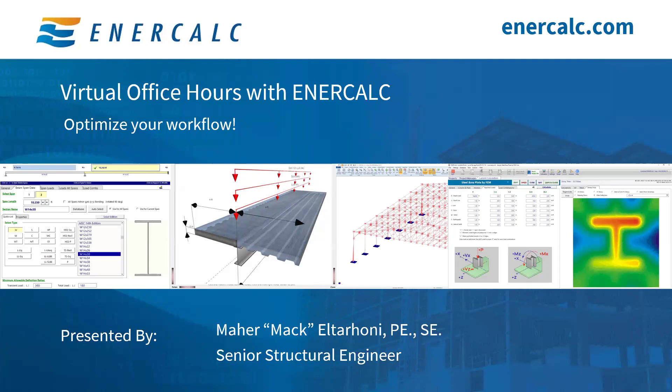As Seth said, I am Mack Eltarhoni, and I'm excited to be presenting to you today the wood beam module from ENERCALC's library of diverse and extensive modules. So I'd like to start our session with a brief overview of the overall agenda. Today we will be covering a PDH announcement, and then we'll go over ENERCALC's latest build, what's new in ENERCALC, and then we'll really dive into the wood beam module, and then we'll talk a little bit about how to register for office hours so you're notified in the future directly in your email. And finally, we will wrap up with live Q&A.

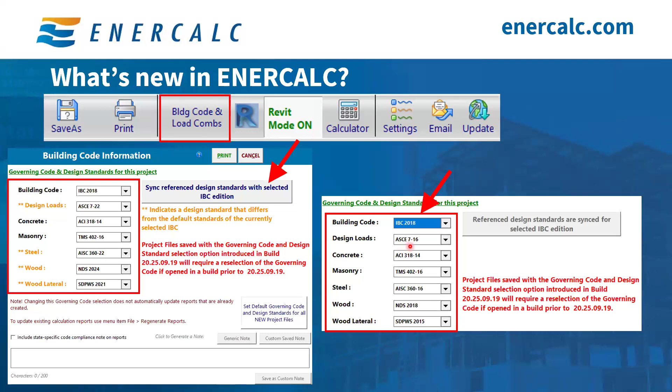So once you have this all done, then you're good to go. Everything is compliant with the IBC version that you selected, as you can see here, ASCE 7-16 instead of 7-22. So keep in mind, all of the code changes that we just did will only apply to the calculations within this ENERCALC file. If you want to apply the code selection as a default for all future projects, so every time you open a new project it will show your selection as the default, then you will need to take it a step further by clicking on this button.

If you click on this button that says set default governing code and design standards for all new project files, you will get this window, and it will show you the old defaults and the new defaults that you want to change to. For example, the old default was IBC 2018 and ASCE 7-22. But if you remember, when we synced everything, this became ASCE 7-16, and that's exactly what happened here. So I'm trying to just set these as the new defaults.

If everything looks fine, then I click save and close. If they don't look right, then I cancel and make the adjustments that I need to make. So once the new defaults have been selected, every time you open a brand new ENERCALC file, those will be the default values for the code and the design reference standards.

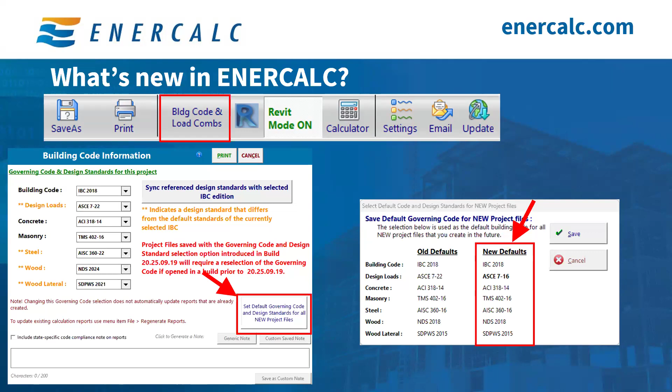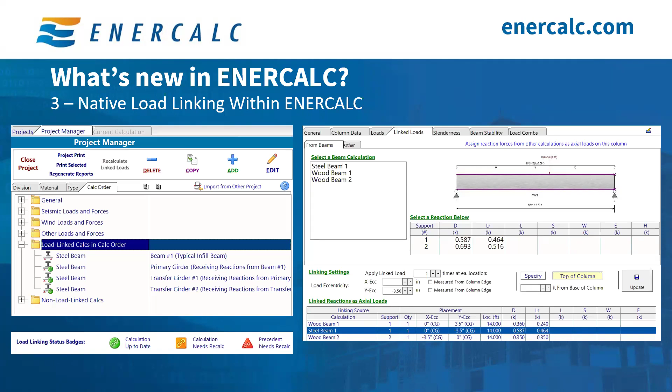Load linking is currently available for steel beams, wood beams, steel columns, and wood columns, and we are actively working on integrating more modules as we go. So if you'd like to learn more about load linking, I created a playlist of short videos on YouTube to walk you through how to use load linking step by step, so you can start leveraging this tool in your projects. I also added a new video recently, about 3 months ago, I believe.

I added a new video to the YouTube load linking playlist for a full practical example of how to use load linking in a real-life design application to transfer reactions from a wood beam to a steel column or from a wood beam to another wood beam and so forth. So we've got a pretty decent variety right here to show you how the load linking for steel and wood is interchangeable and they all play together nicely.

This definitely is a huge help to minimize the risk of transcription errors. But in reality, the most help I get out of this is whenever you have rafters sitting on a beam, sitting on a column, or maybe a beam, then a transfer girder of sorts. If you have just this spider web of members sitting on top of each other, it's definitely nice to have this automatic method of tracking the loads and bringing them all the way down without you having to do this manually and transcribe them from one calculation to another and track all those changes.

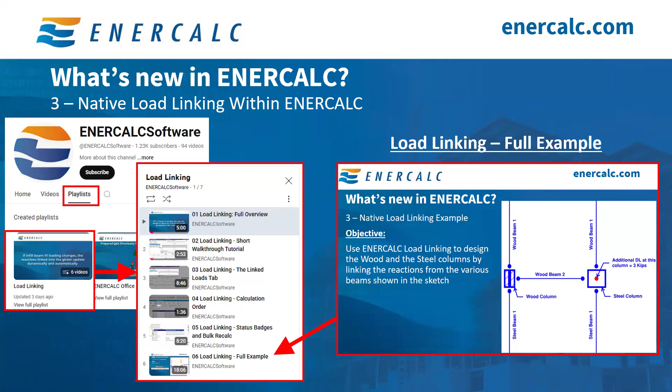Another update is the ability to export tabular detailed results from ENERCALC to a CSV file. This is, of course, useful to many engineers who like to post-process the results outside of ENERCALC. Maybe they have their own calculators or spreadsheets that they want to take some of these values that we provide and post-process them. So this makes it a little bit easier to interface with other tools that your team might have at their disposal.

For example, you can click on whatever detailed results you want, for example, the ASD shear and moment, and I can just right click, save to a CSV file, and it'll be downloaded and we'll be good to go. And you can export results to CSV for pretty much all of our modules now: columns, beams, slender walls, shear walls, foundations, and all of our analysis modules.

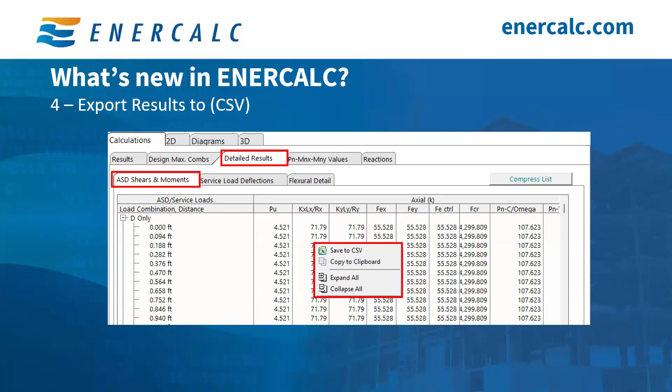This is also something that we added in recent months by popular demand. But we made an important update to the general footing module. Our users now have the option to specify top reinforcement in the footing for those cases where you have tension at the top of the footing rather than your typical case of tension at the bottom. You can specify rebar size and quantity separately for each direction. You can see it right here.

So the standard module that we've had for the longest time used to have just bottom reinforcement, parallel to X and parallel to Z. So those are the two directions, and you can have the bar size and the quantity of rebar controlled differently for each section.

Now you can check this option to say specify top reinforcement, and you can do the exact same thing. So this allows you to specify the four reinforcement that you need to have, the four layers.

And we expanded here our results to try to be a little bit more descriptive. So it says bottom tension, bottom, top tension, top tension. So it just kind of helps you a little bit in each direction and what controls in that direction, to give you a little bit more ease of navigation.

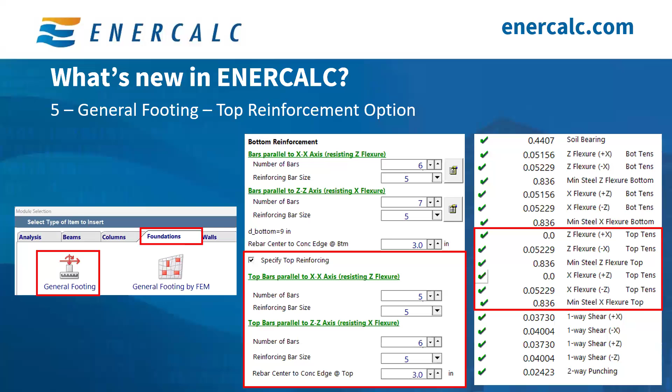And another item that's been really a huge help to many people is ENERCALC for Revit, especially for firms that already have the engineers do their own modeling. They do a lot of the work in Revit, and they use ENERCALC to perform a lot of their designs, beams, columns, and all of that.

ENERCALC for Revit is pretty much a Revit plugin that allows you to design structural members fully within Revit without having to export information or analytical models or analytical sticks or anything to another outside calculation software. You can do everything directly from your familiar Revit environment.

So if you designed a beam, it knows that, okay, this is the beam you have, these are the reactions you have. And next time when you go and design the column adjacent to the beam, it will say, okay, you have this beam framing into that column. This is the reaction that's coming from there, and it'll grab it for you, envelope it, and take care of it, and it tracks this load path very intuitively and very easily.

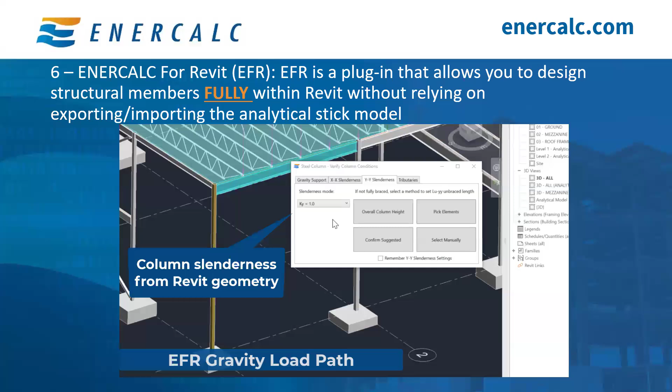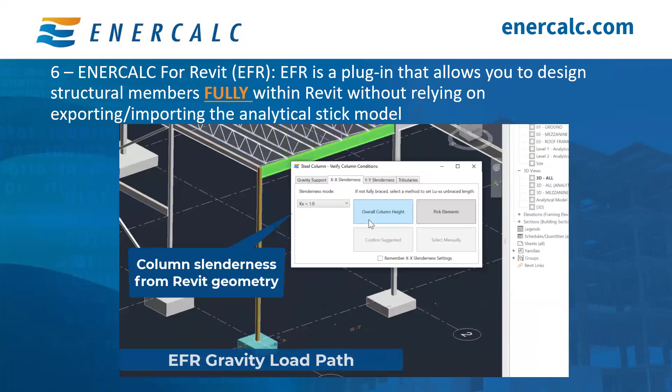And currently, ENERCALC for Revit supports steel beams, steel composite beams, wood beams, steel columns, foundations. And this is biaxial loading. As far as foundations go, they take loads in all directions. Steel columns take biaxial loading. So you get the full capabilities of ENERCALC modules baked into this. So you'll have a full gravity load path.

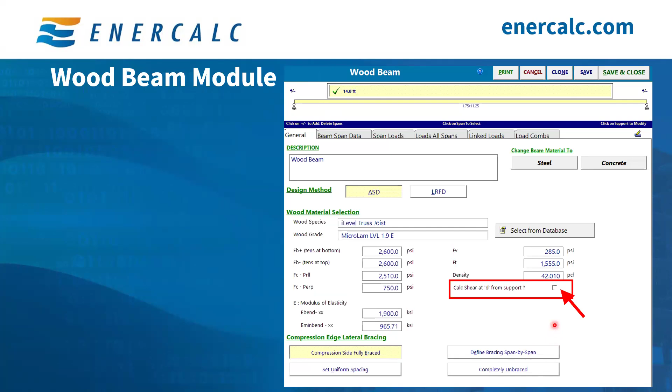So just be careful how to implement this option. For me, I'm just not going to implement it, so I'm not going to be worried about it. But if you do use it, just be aware of how it's used. Also, if you do have point loads within that D distance, the code does not allow you to ignore them. You're allowed only to ignore the uniform distributed load portion, but if it's a point load within that D distance, you can't ignore it from a shear perspective. So if you use this option, just be aware of the various nuances in there. If you skip it, then it'll just use the full shear and everyone's happy.

So moving on here, the last item that we have under this tab is the bracing for the compression side of that member. This is lateral bracing for lateral torsional buckling, or really the beam stability factor calculation. So this is a roof beam with wood sheathing on top of it, so I am comfortable assuming that the compression side of the beam is fully braced. However, you can pick other bracing conditions. What matters is that you do have the options to do whatever you want to do.

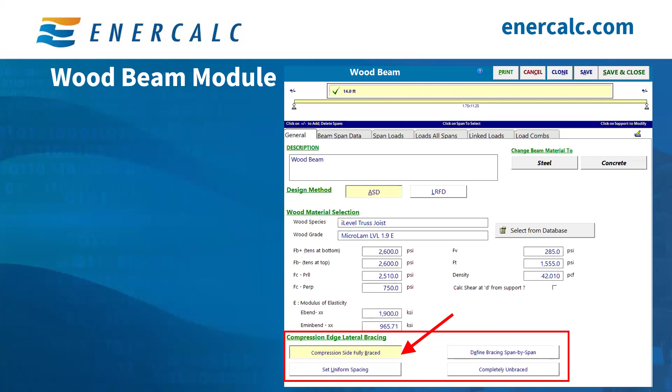So you can pick other bracing conditions, such as bracing at certain spacing intervals, maybe every 2 feet, every 8 feet, every 5 feet, whatever you want to do. You can say it's completely unbraced. Also, this is a single span, just the 14 feet, but if you have a multi-span beam, you can define the bracing condition for all of the spans of the beam, or you can pick one span at a time and say, for span number one, we're fully braced. For span number two, I'm not braced at all, or maybe I'm braced only at 2 points. So you have a great level of flexibility in determining what that bracing looks like. So again, for us, we're just going to assume the compression side is fully braced.

Moving on to the next tab, which is the beam span data. So we have, again, one span. It's right here, and it's 14 feet based on our example. And now we're ready to determine a size or use a size. So we have one of two approaches here. The first approach is to just pick a size, like, okay, I think this is the size that I want to use. I think this would work, or maybe you have an idea that you want to test.

So you know a particular size, 1.75 by 11.87. That's what I want to use. So I'll just click on the Microlam. So this is right here, and then I'll get the various sizes that are recorded under the TJ Microlam, the LVLs.

So then I'm just using this size. I can go there, click on that, and see if this one works, or if it doesn't work, then I'll change it, I'll play with it. And this is the manual method. So that's the first approach.

Another way of approaching this is using the auto select button right here, this button right here. So the auto select button, this second option right here, allows ENERCALC to auto select sizes for you by clicking on this button and then getting this window and choosing certain parameters. So if you click on the button right here and you get this window, you will be able to almost kind of choose. First of all, you can choose your wood type, what do you want to use. So it's a micro lam, so it looks into that family of members.

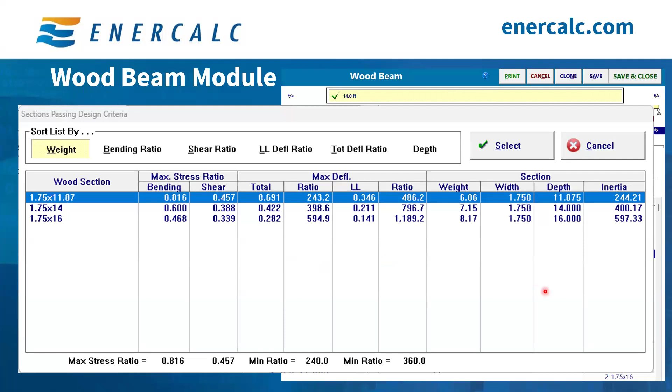So this kind of gives you a good idea about the various sizes. And then you kind of have to select which one you want to use. But at least this narrows it down based on your criteria. And it runs this little bit of grunt work for you. So for us, we're just going to go ahead and use this 1.75 by 11.87.

So there's something here that's worth noting: member width and depth are auto-populated based on the member size that's selected. So you selected 1.75 by 11.87. Those are the right sizes right here, width and depth. They're auto-populated. However, if you do have some sort of a custom size member, maybe you have something that's 2.25 by 14 and 3/8.

If this is what you got, if you got the manufacturer to make something like this for you due to maybe special conditions or whatever, you can always put that information here and it will run the numbers based on that, because it uses these sizes, the width and depth, to come up with your IX and IY, and of course your area and all of the other information that you might need to move forward. So if you have something different, you can always use that right here.

Now, this option, we're not going to get into it that much because it's not part of our example, but this option that says all spans minor axis, YY bending, means that this member that you're using, the 1.75 by 11.87, if we want to load it in the minor axis, on the weak axis, aka flat wise, if that's what we want to do, then you click on this option right here, and it will run the numbers based on this member being flipped on sideways and run in the weak axis.

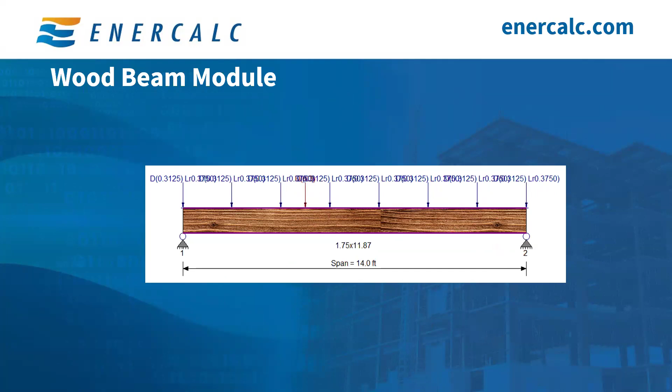And of course, lastly, here is your load combinations. You have combinations for strength combinations, you have combinations for deflection and reaction combinations, and you can do whatever you want to do there, turn them off, turn them on, add new ones, and so forth.

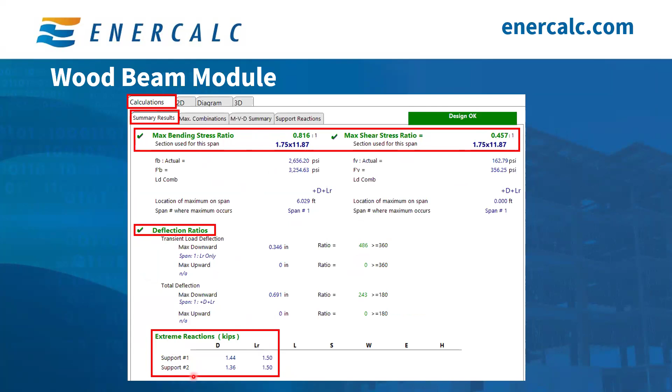Now that you're really finished with all this, now you can finally evaluate the results. So if you click on calculations and summary results, you can see your maximum bending stress ratio right here, your maximum shear, your deflection ratios, and your extreme reactions per support. You get, of course, all of your shear and moment diagrams right here.

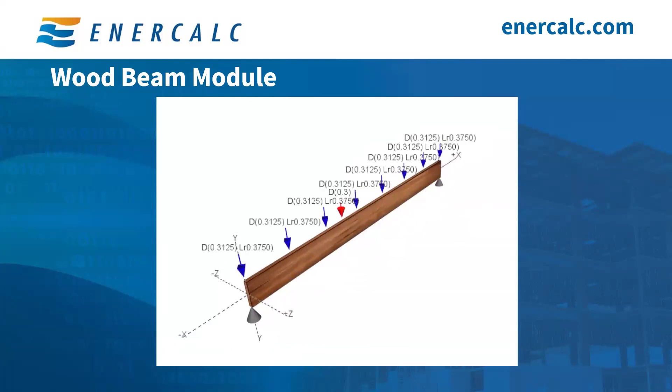And this is your 3D model that I was telling you about that you have in ENERCALC. Everything in blue means that this load is linked. What's shown in red, that means that this load is manually applied. So again, at a quick glance, you can see if your load is linked or applied manually. So if you want to make any changes to it, you can easily do that. So this kind of wraps up the wood beam module.

And another thing that I want to share with you today is that I want to note the growing library of verification calculations that we've been creating recently. So you can navigate to them by just clicking on our users page, documentation, and then verification calculations. And you'll see a list, a small list, but we're adding to it. And you can see, for example, this is the wood beam verification calculation that I did.

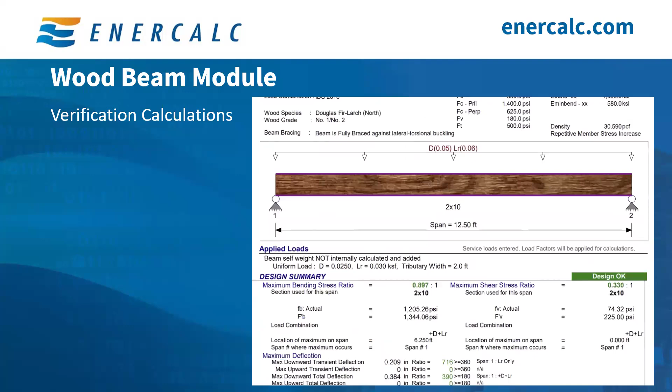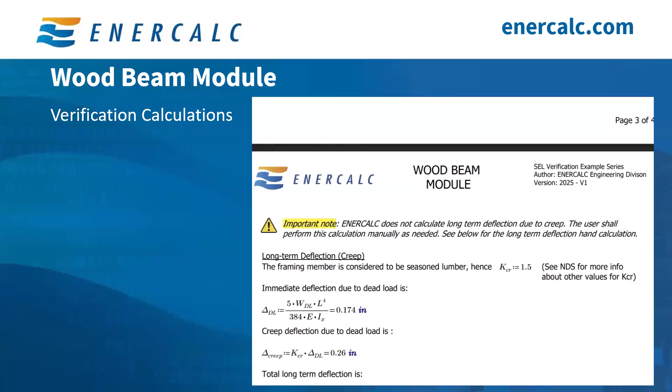So you can see here, it takes you through the whole process, and then it shows you or attaches an ENERCALC report for that same calculation. So this way you can see the hand calculation versus the reported results. This gives you a good idea of what's happening within ENERCALC, and also it's a great learning resource for, of course, younger engineers, and it's a quick refresh for those who need it.

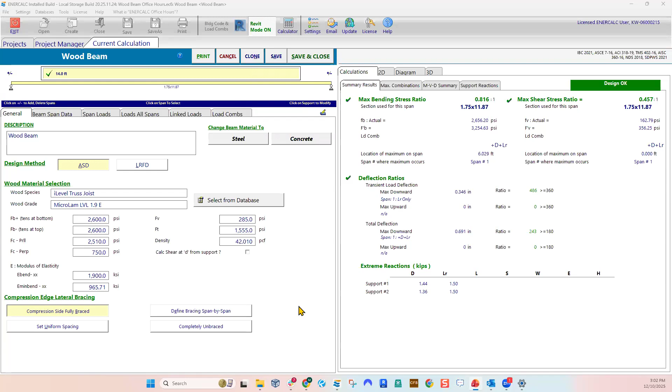Question from Lutfi: my 3D tab does not work. I'm going to assume you're talking about the Woodbeam 3D tab. You'll want to make sure that you're on the latest update, which is 2025 1124. And if you are on that latest update and you have valid input data, then go ahead and reach out to the support team, include your build number and your calculation file.

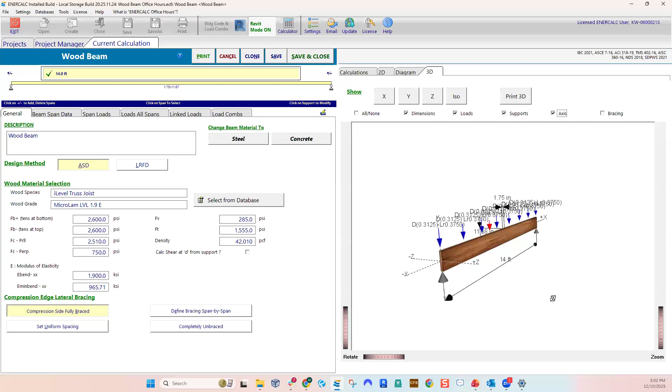You will notice in some cases, especially in steel beam, you don't have a 3D view or a 2D sketch if you don't have a valid section size specified. So that's the first thing to check. But don't hesitate to reach out to the support team if you have valid inputs on the latest build and you're still seeing this. Once in a great while, there are certain hardware configurations or graphics processors that don't like to play nice with those 3D schematics.

All right, Mac, question about linked loads. When linking those rafter loads, can a rafter be specified at x equals 0 and x equals L related to load tracking to columns? Yes. So if I understand correctly, you're trying to apply that same reaction at two different locations, and you can absolutely do that.

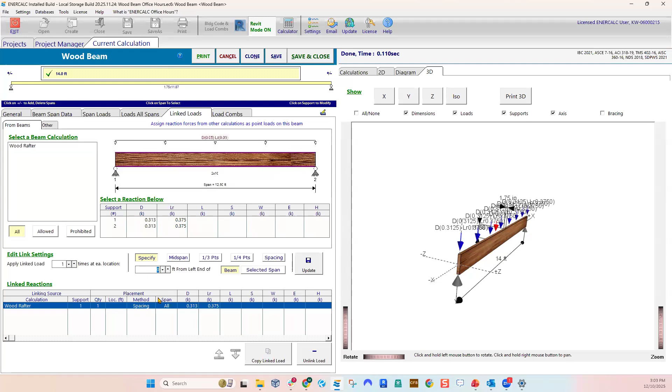So I'm going to update this to specify for the beam, and I'm going to put this at 0. And you can see it right here, it's just this blue one. And I'm going to grab that same reaction again and apply it at 3 feet, for example. So it's that same reaction, reaction number one, applied again, and now it's shown up there.

And if I want to do the same thing, I'll grab the same one and apply it at 8 feet, for example, put it right there. So you don't have to have a uniform spacing. You can apply that same exact reaction multiple times at different intervals based on what your project needs.

Yeah, absolutely. One of the things we love most about load linking is that it's not a one-to-one relationship. You can relate a particular reaction to many different calculations, many different locations on another calculation, and so on. Feel free to ask if you have follow-up questions on that.

Question from Steve: on the printouts, how do you keep the loads from doubling up on each other? So we definitely know there are some things we want to see cleaned up on our 2D visualizations for loads, which of course crosses over to your printed report. If you have a densely loaded point load situation or a number of linear loads right on top of each other, you can sometimes get some schematic overlap.

Feel free to reach out to the support team if you have some screenshots of a specific condition that you're struggling with, but please rest assured that is on our radar and we don't intend for those kinds of messy overlap situations to persist in those 2D visualizations.

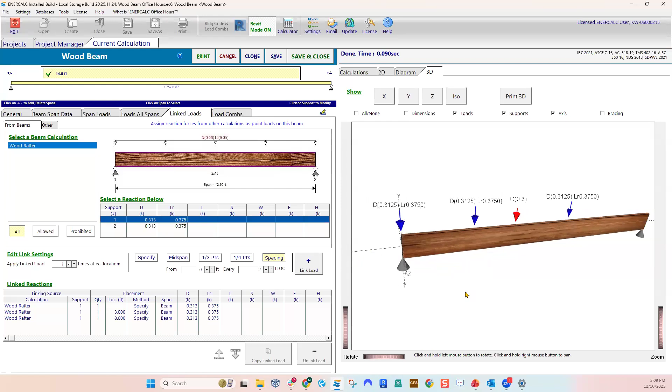Yeah, exactly. And like we discussed in the answer to the earlier question, you always have the ability to go ahead and link a particular reaction multiple times at different locations. And so because it's not a one-to-one relationship, you can take that reaction and link it at a number of arbitrary locations, a few extra steps, but you do have that flexibility and it's all dynamically linked. So if you have an update in the future, then those values will update. All right.

Next question. If we're checking a slab as a strip in ENERCALC concrete beam module, how can we avoid the shear stirrups requirement as per the code applied? Any information regarding this issue? Yeah, so obviously we're aware that some engineers who are designing one-way concrete slabs do use the concrete beam module to assist with that process. And we have some FAQs about this as well as in the documentation specifically for the beam module.

You can use the beam module as an aid, but you're going to have to use some engineering judgment. You can extract some valuable information, for example, your moments, the analysis, the flexural design. You may have to take some of the detailing requirements with a grain of salt because it's specifically geared toward beams. So we don't have a purpose-built slab module at this time. Mac, do you have any thoughts to add on that? No, that's it. Yeah, you covered that, right?

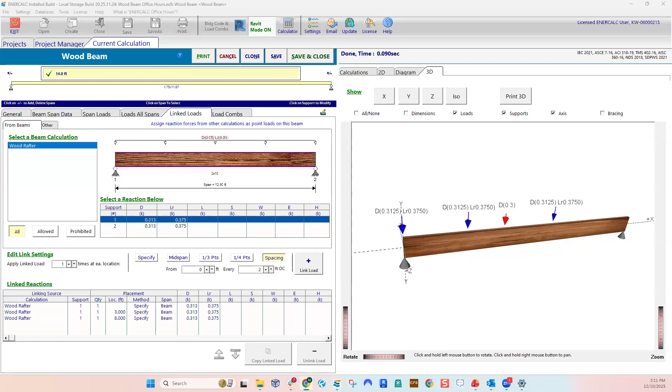All right. Is there a way to input different beam sections on a continuous beam on several spans, including concrete beam? So Mac has the interface up right now for wood beam. Wood beam does not provide the capability, as far as I can remember, to provide a different section from span to span. The steel beam module does, obviously, because when it comes to steel beams, you can actually provide continuity through welding, and you could have continuity from one section size to another as you go from span to span.

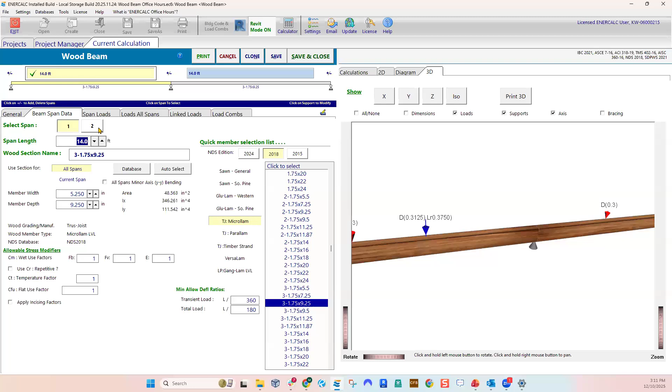The concrete beam module, I believe, also does allow the capability to use a different section size, span by span. And steel composite, obviously, we're only doing simple span because steel composite doesn't support moment reversals. So hopefully that answers your question.

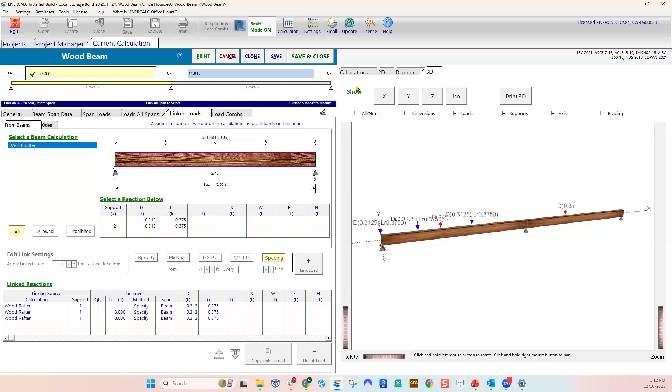What is the main difference between wood beam design and multiple simple beam design? This is an interesting one. So multiple simple beam is sort of a convenience feature that some customers really, really love, which is why it still exists, but it's not functionally, engineering wise, any different than simply building a series of individual calculations using the individual material specific modules.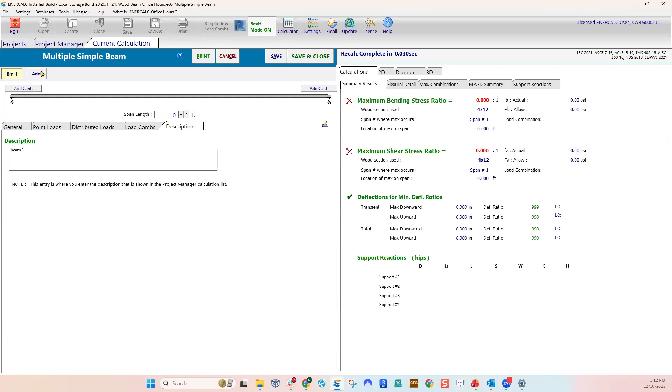So for those who aren't familiar, Mac is showing the multiple simple beam module on screen right now. And what it basically does is just let you create a series of beam calculations inside one calculation instance in your project instead of having a multitude of individual wood beam or steel beam calculations. Functionally, it's a little bit more limited because as you can see at the top of Mac's screen, we've got a simple span and you can just add left cantilever, right cantilever. You don't have those multi-span capabilities. So that's probably the biggest functional difference that you would see.

You can do robust arbitrary span geometries in your wood beam module. You can also do load linking in your wood beam module. Those capabilities are not available in your more simplified interface of multiple simple beam. Go ahead, Mac, if you were going to draw attention to something. No, yeah, that's exactly what this is for.

I personally use the multiple simple beam module if I have, for example, a single story building and I'm just running a bunch of beams or rafters, wood rafters, and one is like 10 feet and one is 12 and one is 13. And I want to just document every one of these, but I don't want my project manager to be just completely crowded with 20 calculations. So that would be a fantastic place to put a lot of these simple span or maybe just a single beam with a little overhang on one side.

I think we can house up to 10, if I remember correctly. You can put up to 10 in here under one hood, I guess, one calculation. So that's where this really shines. It doesn't crowd your ENERCALC and at the same time you run the various conditions, and you might not want to print all of these conditions, but this is kind of your quick verification that okay, well the 11-foot span works and the 12-foot works and the 9-foot works, and we're good to go.

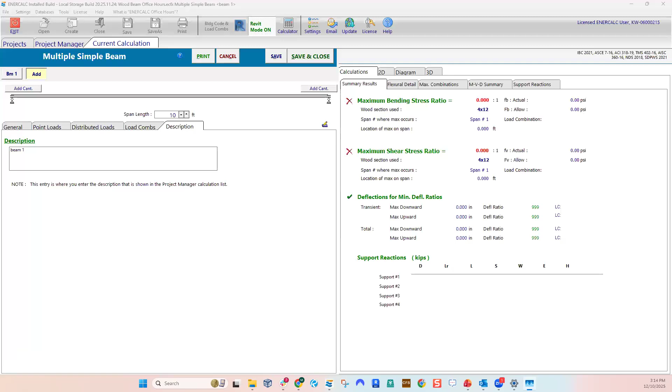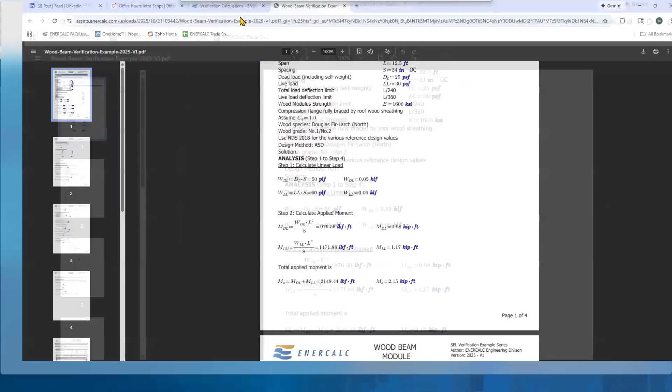Mac, a question on the verification calculations. Can you show us again where to actually navigate to see those verification hand calcs? Yes. I actually was exactly going to do that. Perfect. So if you go to just enercalc.com and if you click for our users and you go to documentations, you'll see right here. You'll find the user manual, some training videos, but the one that I'm interested in right now is verification calculations. You click on that, it'll take you to this page right here.

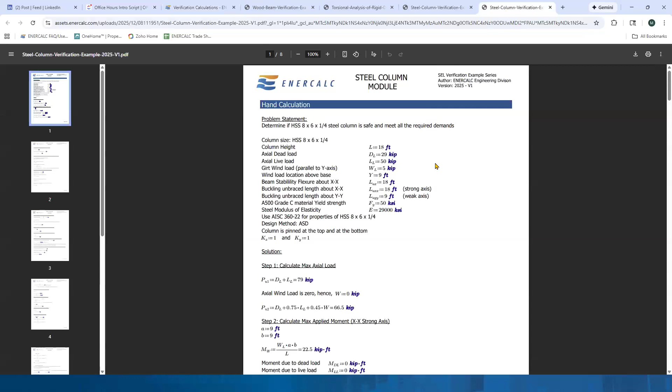And currently we have a few of these, but most notably, we got the steel beam, the wood beam, we got steel column right here. So you can see those are, in my opinion, easy to follow calculations. They tell you exactly which edition of the code or design standards this is based on.

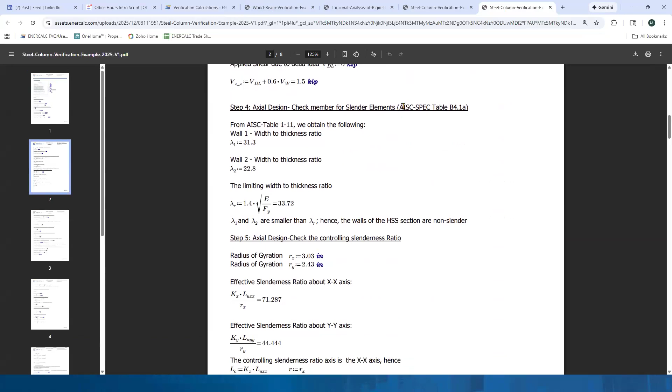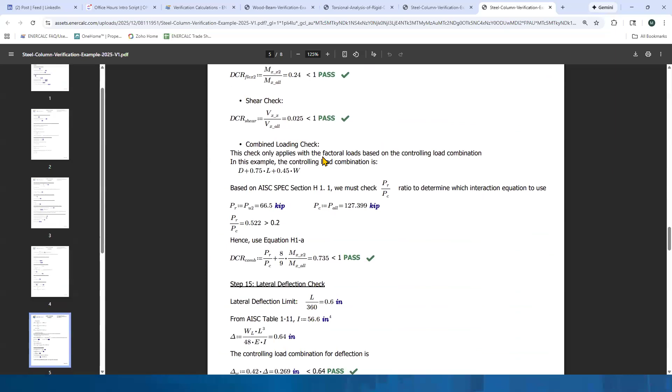And it walks you through, this is for steel column, it walks you through where the references are, what we're doing, and it takes you through the full step by step, almost like textbook style calculation where you get to see everything. And then you see the following ENERCALC printed report for that same member that we designed by hand. You can see right here and you can compare.

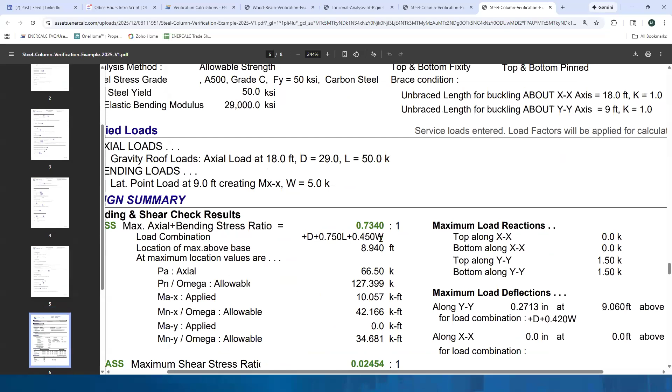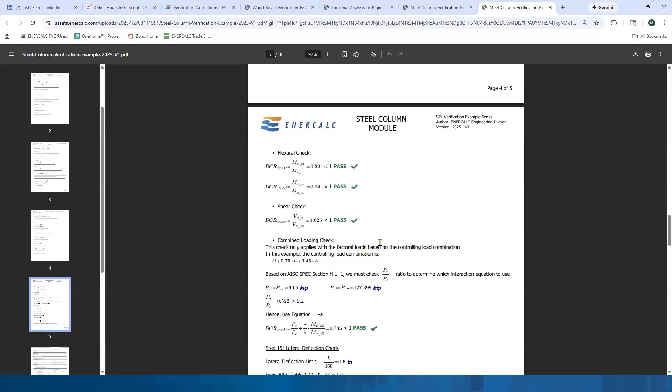So for example, bending stress ratio right here is 0.734. And if you go to our calculations way up here, there you go, 0.735. So you can kind of compare what you have in the calc versus what ENERCALC is reporting. So this is for steel columns.

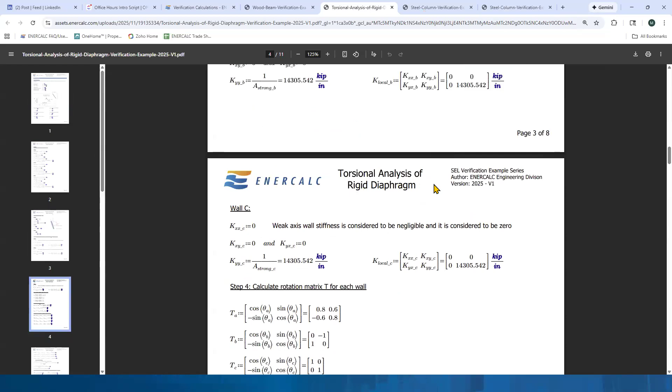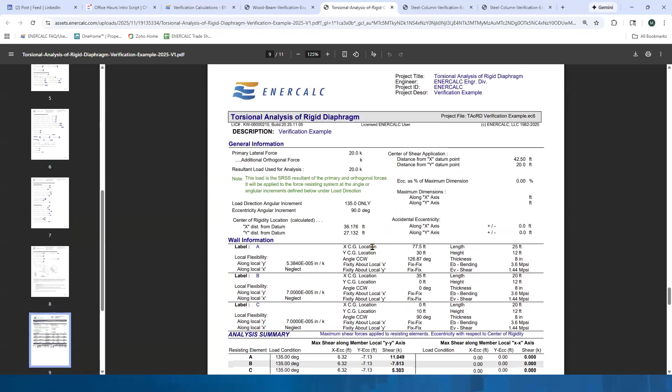We have steel beam. This is a full worked out example of a rigid diaphragm analysis. Oh, so pretty. Yeah, I know. This one was great. So this walks you through the whole thing. If you feel like you're really into it, that's where it's at. And again, you can compare this directly to the results reported here by ENERCALC. But at least this gives the users an idea of what logic lies behind all of the results that they're seeing.

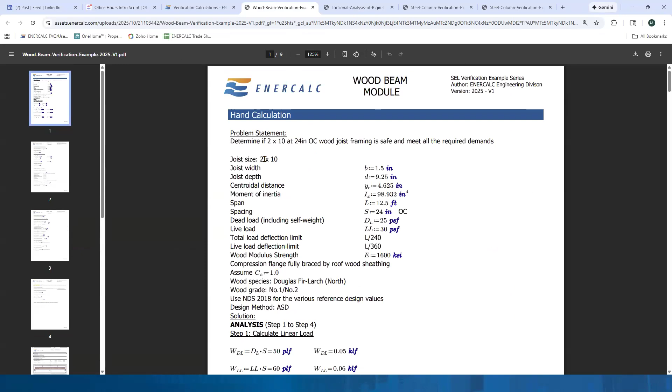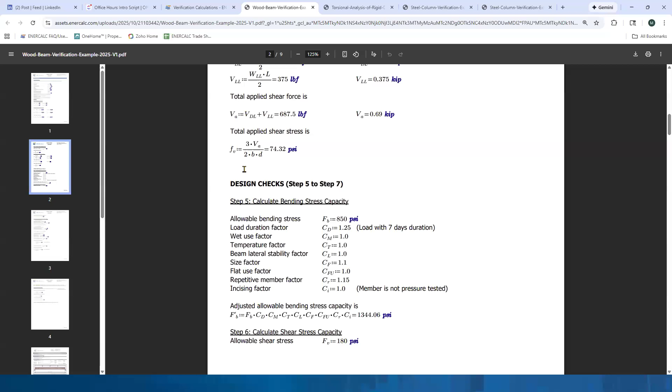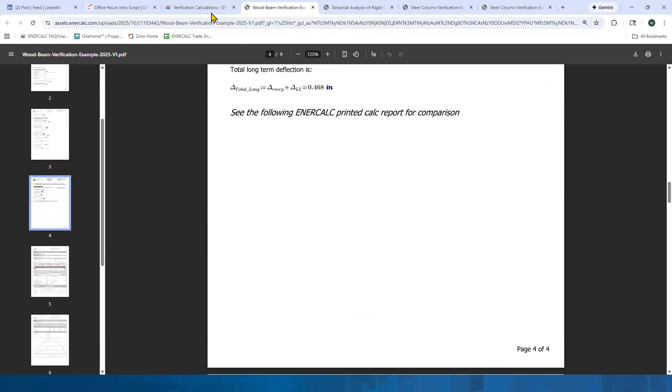And this is the one here that I'm highlighting now. This is for the wood beam. This is actually the rafter that I was talking about that I designed. So this is a 2x10, 24 inch on center. And you can see this is all of the stuff, the analysis, the design checks, all of the various codes here, various information or code checks. And again, as it relates to ENERCALC printed calculations directly. And we'll be adding more of these as we go.

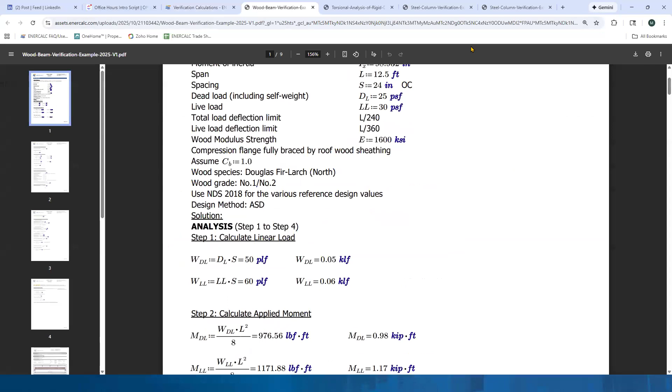So stay tuned. Absolutely. And just to again clarify, as that earlier question touched on, these are static verification examples that basically demonstrate the internal calculations happening inside ENERCALC. These are not hand calculation style report printouts that you can generate for your individual calculations. So this is just a set of example verifications that you can access on our website.

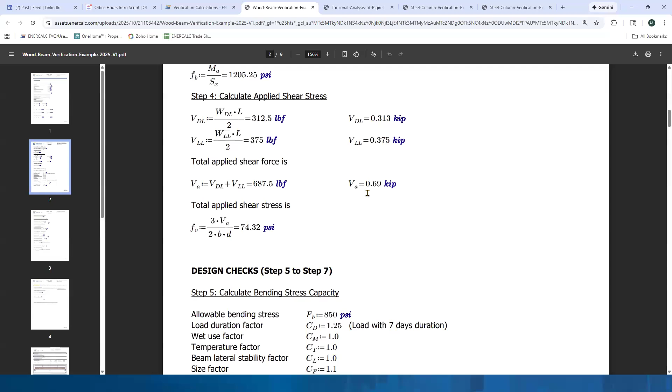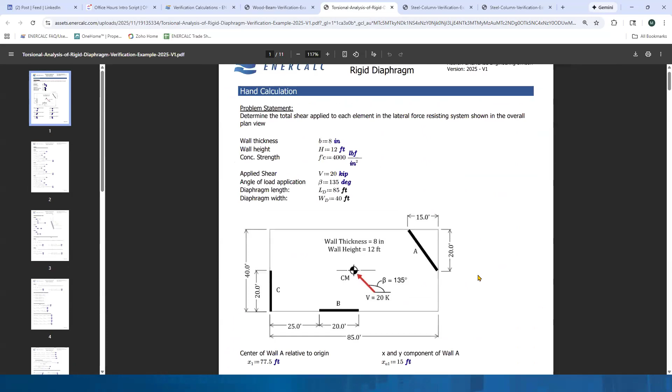All right, next question. Are there any plans to create a module for wood diaphragm design and or deflection? So hopefully you guys don't get too tired of hearing this, but if there's ever something you have a question about that doesn't exist in ENERCALC, absolutely send that to us. I don't know if you guys have ever visited the About Us page that actually shows the ENERCALC team on our website, but we're real people.

And even though we serve a huge number of customers throughout the United States, we're a very small team, and we're all practicing engineers who come from industry, and a team of software developers who have been working on this product a long time. And so we want to do what customers want and need. Our whole engineering team looks at those feature requests when they come in, and we consider them carefully because we all came from engineering practice. It means a lot to us to see what customers want ENERCALC software to be.

So people may occasionally get tired of hearing send a feature request, but we really look at those and consider them carefully. So stay in touch when there's things that you want to ask about. For example, your wood diaphragm design, diaphragm capacity, deflection, absolutely send that over as a feature request because it helps us form a better idea of what practicing engineers need and want ENERCALC to be.

Is there a workaround for the design of tapered and or notched wood beams? Mac, feel free if you want to share thoughts on this. There's not explicitly any capabilities for that in the existing module today. No, I agree, there really isn't. I can't think of a good workaround, to be honest. Okay. Again, that would be a great feature request for future consideration for the wood beam module.

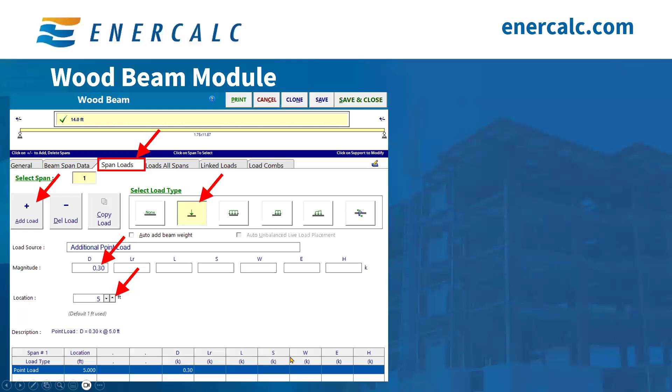Mac touched on all your different factors, the NDS factors for beam design. One of those is the incising factor. Incising factor refers to the effects from the process of basically penetrating the wood beam to inject the pressure treating material, and that can be set right here where Mac is showing.

Right here. So if you apply the incising factor, there's a calculation that takes place in the background. So if you say you apply it, then the calculation will occur. It'll calculate the factor, and then it'll multiply it by your stresses as required by the NDS to reduce those capacities. And then obviously on top of that, don't forget your wet use factor if you're going to be in a permanently saturated environment. Yes, that's right.

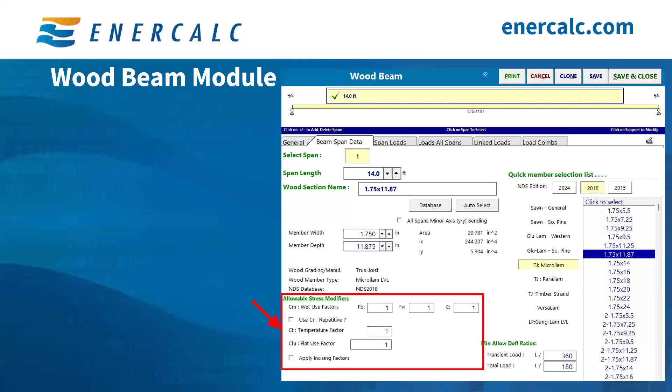Next question. I would suggest that ENERCALC add a module to design concrete pile cap. This is an interesting frequent flyer topic. Mac, what session was it where we talked a lot about pile caps and we got down the rabbit hole a little bit with strut and tie modeling? Yeah, sessions ago. We had an interesting discussion earlier this year where some questions were posed about pile cap design. Oh, it was because we did the group pile analysis. A lot of you may know ENERCALC has the pile group analysis module, which basically takes an applied loading and transfers that loading to axial force demands in the individual piles within a group. That gave rise to some interesting discussion about design of pile caps.

And we talked about a number of different things, including the CRSI handbook approach to pile design, deep beam analogies with finite element modeling, strut and tie modeling either by hand or by finite element. I've done all of those different processes in design practice. And I know there's engineers in here today who have done those as well. There's not a single consensus solution about the best way to design reinforced concrete pile caps because it's either a very complicated deep beam problem or a 3D strut and tie problem.

But if that's something that customers are interested in, don't hesitate to let us know about that, and we'll go ahead and keep an eye on it. It's difficult to tackle things like that where it's very experiential and engineering judgmental because we don't want to put ourselves in a position of making engineering judgments on your behalf as a design professional, which is difficult when there's not a closed form solution. And pile cap is definitely one of those scenarios where there's not a single consensus closed form solution. Great question, though. It's a very interesting topic.